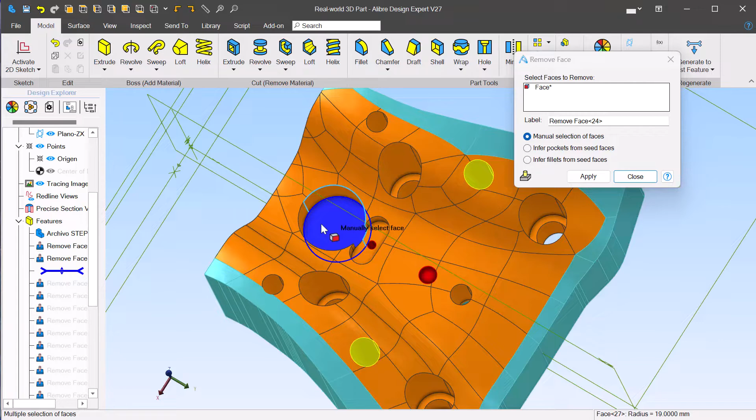Do the counterbore, the center hole first. Now pay attention here, we have the hole going through the slot. Watch how nicely we restore the slot. Okay, so from there I'm going to take us over into EZCAM.

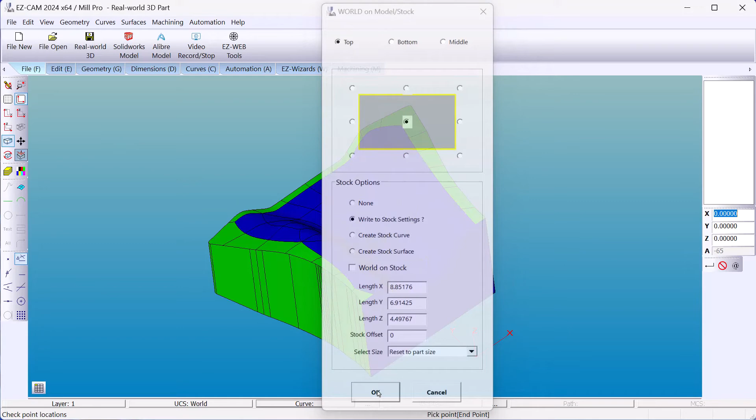We're going to position our coordinate system at the top of the model in the center. We'll create a roughing pass, but let's take a look at the diameter of that slot. You double click on the radius and we have a diameter of 0.55, so we can fit a 1/2 inch

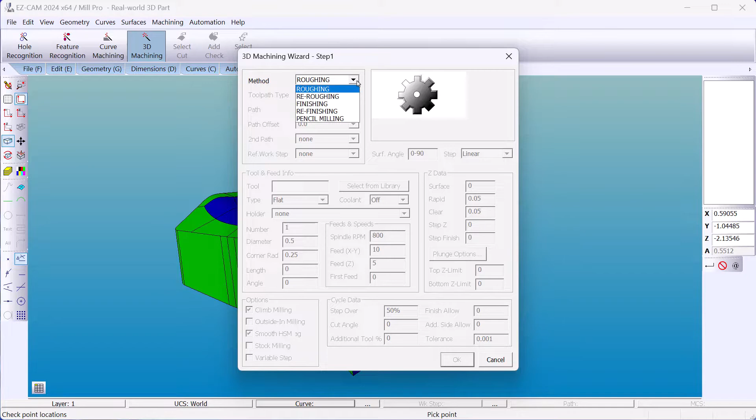Cutter in through there. We're going to go to the wizards, 3D machining. We'll begin with a roughing work step. I'll choose pocketing, the path is automatic. It's going to be based on the surfaces I select, or EZCAM automatically selects all surfaces for us. The path offset, I can go beyond the part boundary by the tool diameter. There's nothing in the way. Flat end mill, let's go with a 3/4 tool.

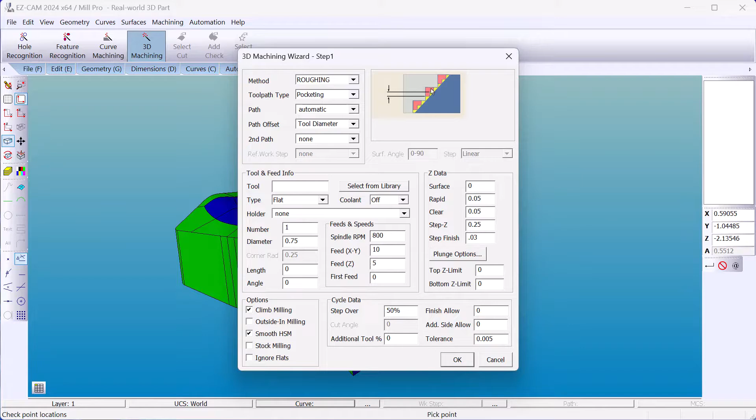As for a Z step, I'll be aggressive at 1/4 inch. That'll carry us down step by step into the cavity, so I'm going to use a step finish of 30 thousandths to machine just up against the wall. It's not going to machine the entire part at that level. We're using high-speed machining, step over 50%, and we'll put in a finish allowance of 20 thousandths.

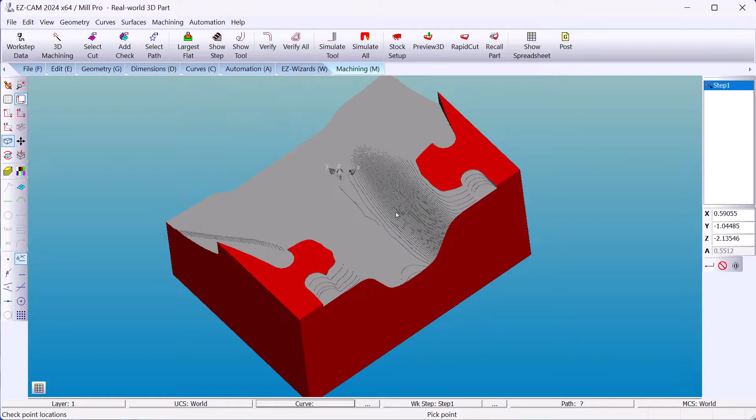And as you can see up against the wall, there's our 30 thousandths.

So the next operation I'm going to create is machining this slot. That's a 2D operation. Tool number 2. I'll use a 3/4 inch cutter - I'm sorry, a 3/8 cutter.

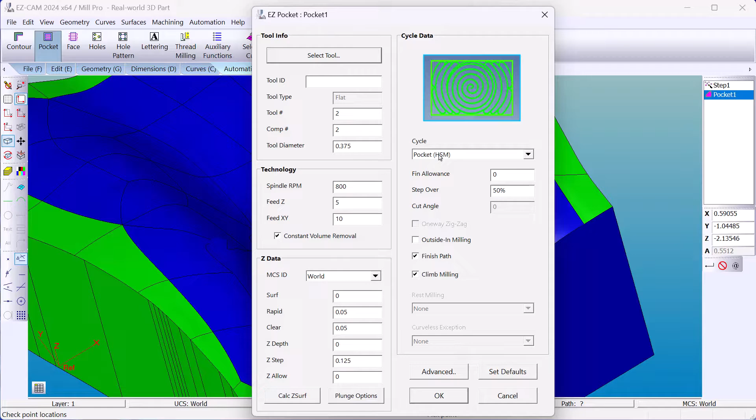The depth, EZCAM's going to detect that when I select the bottom face. I don't want to machine with a 3/8 cutter at full depth, so I'm going to go in and step down every 1/8 inch. I won't leave a finish allowance. I'm going to use HSM, which gives me the option of using a finish pass.

Select the bottom face and verify. Now EZCAM was smart enough to know that even though our surface is 0, it's going to skip down. All the material has been removed and it picks up the start height. So I'll just use rapid cut.

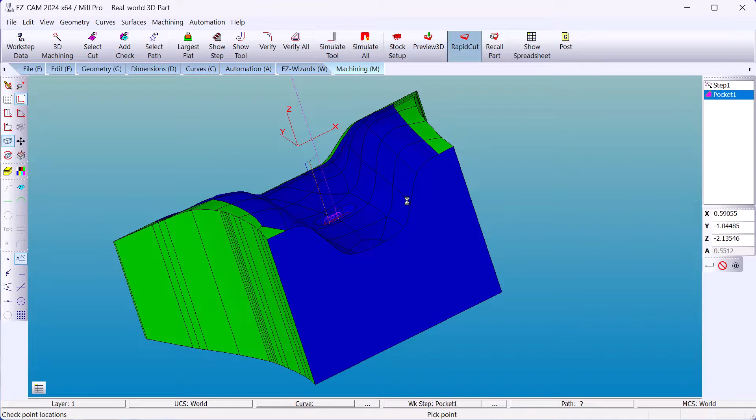Next, I'm going to machine the vertical walls. That'll be a 2D contour operation. Tool 3. I use a 1-inch cutter.

You can calculate your speeds and feeds in the background. If you go to advanced, I'm going to hit calculate surface, and that's going to be at the top of the part is where it starts. This will clear us out of the part. Depth is 0, EZCAM will detect the depth based on the vertical walls I select. And we'll get rid of the Z step.

I want to switch over to multiple passes. Total stock I'll say is 1 inch, and a cut step of 1/4 inch. Now these parameters are going to change based on the type of material, machine rigidity, your preferences.

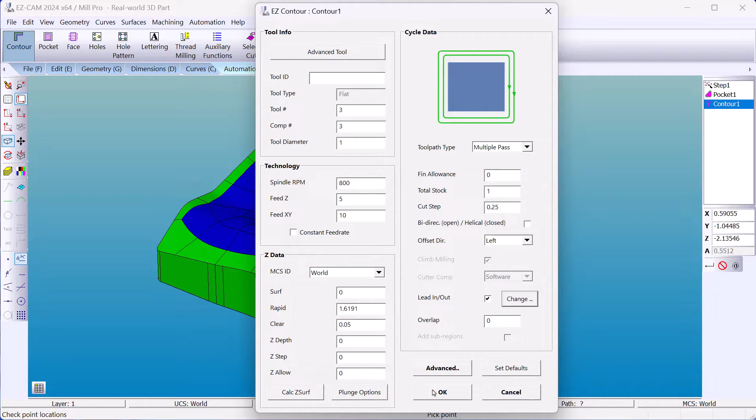So I'm going to use a lead in and lead out. EZCAM gives us some default values, which I will accept. Now with Smart Click, the magic wand, I click one face. EZCAM chains all the faces together that make up that contour. There's our lead in and lead out, multiple passes.

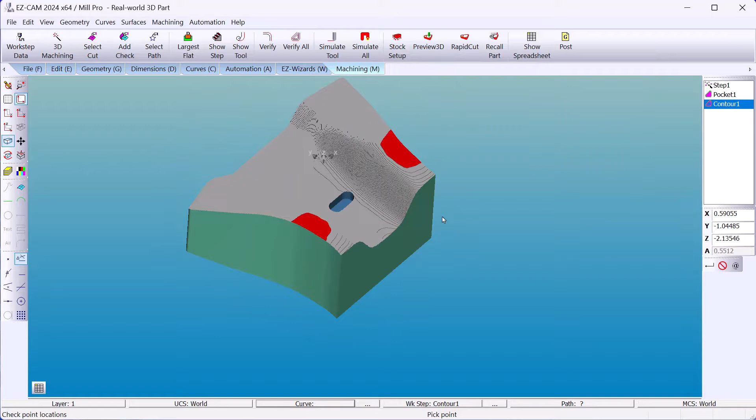Now let's say I don't want to machine this face, it's already been machined to size. I'm just going to select surfaces. Now if I select that face, it turns off all of them. So what I'm going to do is use the shift key, hit it once, select that face. Now it's not selected for machining.

Now if I want to machine that contour first, if you click on the operation in the list box in the upper right, use the left arrow key to make that the first operation. Use the right arrow key to bring it back down, and that's where I'm going to leave it.

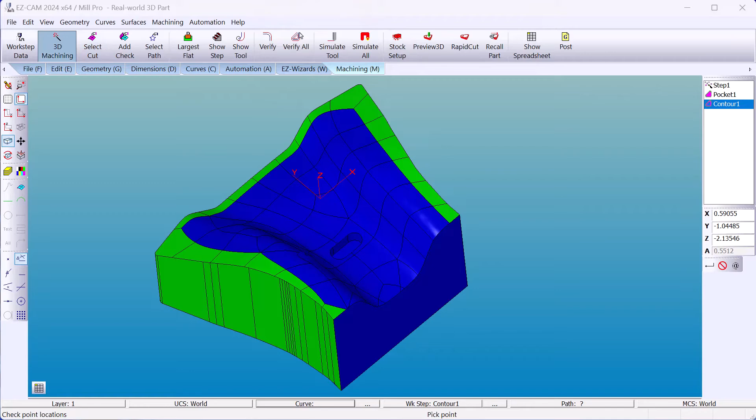Now we're ready to remove that Z step against the walls. I'm going to use 3D machining and create a finish pass. Equidistant is the best tool path we have to offer. It gives you a nice uniform step no matter what the surface slope.

If I use 0 or tool radius, EZCAM treats it as a pocket and would stop the tool at the center of the edge of the surface. If I use less the diameter, EZCAM takes the ball nose tool or bull nose tool and brings it down to the edge tangent without dropping down or without being contained into a surface boundary.

Switch over to the ball end mill. Tool 4, use a 1/2 inch diameter. The step over, the finer the step over, the better the finish. I'm just going to use 25 thousandths to give us a real quick calculation. The tighter the tolerance, the better the finish as well. The program size is considerably larger.

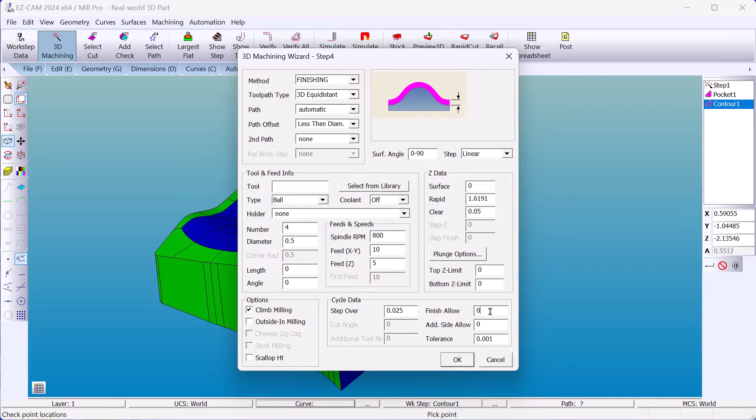Our finish allowance is 0. Now we left 20 thousandths on our first pass, our first operation. If I was to leave 10 thousandths, it would remove those Z steps and give me the ability to go in with a finish pass, which cleans up uniformly. Verify.

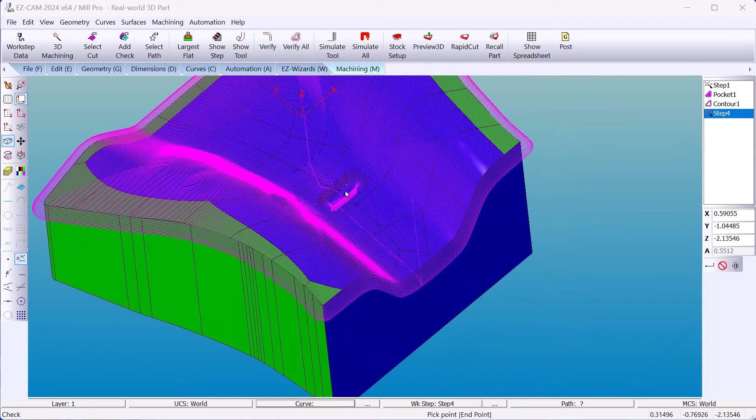Okay, if we zoom in, you can see that a 1/2 inch ball end mill can fit into the slot and machines down to the bottom. Well, I don't want to do that. I want to machine up to the edges, less the diameter, keeping a nice sharp edge based on the tolerance. We're going to exclude that slot.

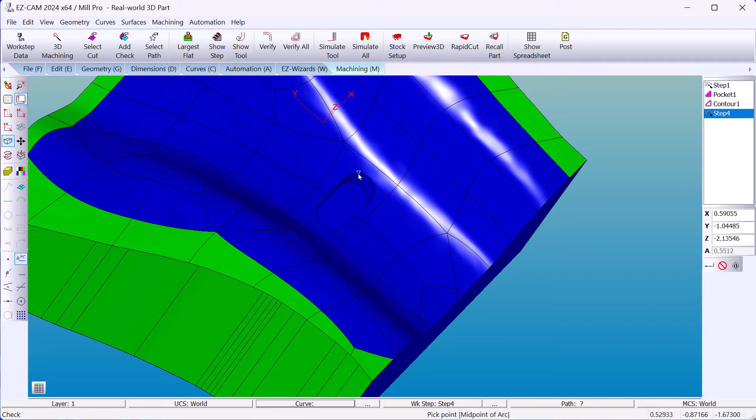We'll select those faces. Now I could stop there. I just eliminated the vertical walls in the flat surface, and the ball end mill will treat it as it should. But I'm going to show you in cases where you might have other surfaces surrounding that you don't want to include them, so we make check surfaces. Make the operation aware of those surfaces without violating them. Verify again. Now we avoid plunging down to the bottom of the slot.

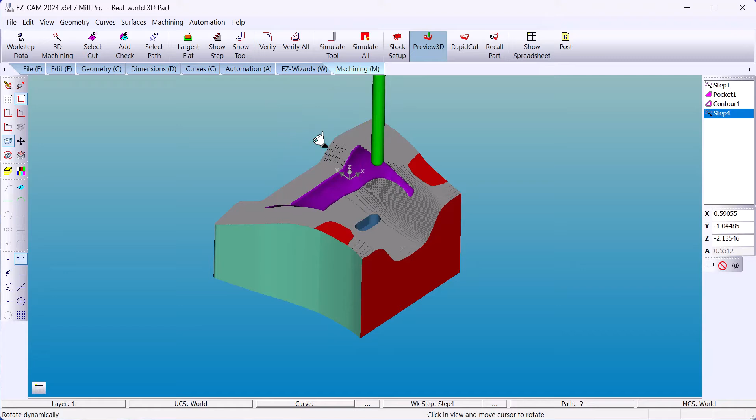Our part is now complete.